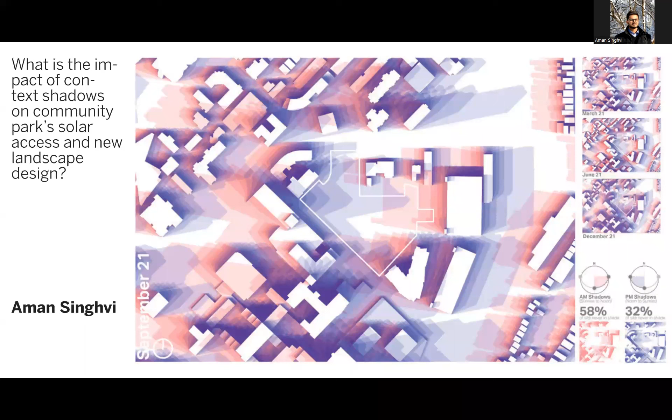I think what the judges liked about this was that it's a fairly simple concept. What is the range of shadows across a day or a season, or within a season? But the innovation is using 2 different colors to express the morning and the evening.

So I think it's simple, it's clear, and I can say we've actually used this concept since we saw this graphic at LMN, because it's really compelling visually, but also in terms of the information it's a lot better than just a simple shadow range study that we've often done before.

Since we can't hear Aman, I'm not going to ask a whole lot. Aman dropped off, unfortunately, so hopefully he'll join in a little bit again. Okay, we'll have to overdub some of his stuff.

Okay, all right, we are going to move on to Misha. Do you want to talk about your graphic? Yes. You guys hear me?

See me? Excellent. So this graphic is for the New Canaan Library, which is a project that our firm has been working on for a number of years, but is actually going to be completed and opened in February. So we can't wait to see if the daylighting predictions really come true. So the need for this analysis came out of a VE exercise. We had this large daylit space with a clerestory that was going to be very magical and light-filled at the heart of the library.

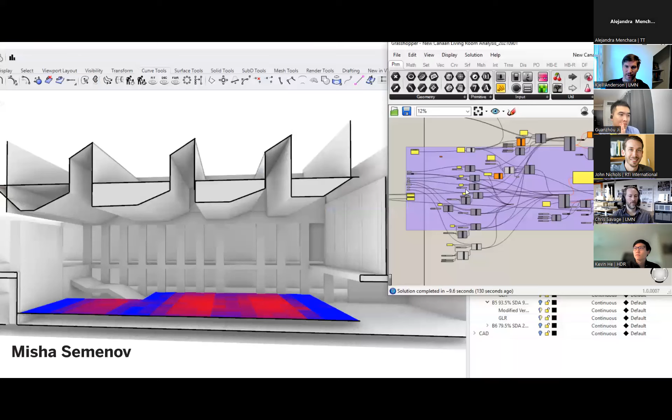So do the sawtooths face south or north or east or west? It's southwest. Southwest. Okay, so they're not trying to avoid having direct sun into them. They're actually facing that direction. Yes, that was very much the intention. And with designing the width being 3 feet, you never really get direct sun coming in, but you always get it reflected off of that wall on the east side.

Yeah, I like the fact that you did use the perspectives. I think that aligns with the 3D model a lot better. That's really a cool way of doing it. And then 300 lux, I think that's a really good choice as well. Is the living room a space for people reading? Is it kind of just a circulation lobby? What's the purpose of the living room?

Yeah, so you can kind of see on the bottom right is the entrance lobby that people would come into the library from, and they kind of circulate up through these levels. So the living room is a kind of pass through to get up to the adult and teen library on the higher floor. But at the same time, it's got couches, it's got a fireplace. It's a place for people to kind of hang out, read magazines, or maybe iPads is what people read now. But 300 lux is actually a good level for both screens and

reading. Yep. And when you say 3 foot or 5 foot skylights, is that the width of the skylight from side to side, or is that the height of it? That's the width of the skylight. Okay, cool. And it looks like they're also fairly tall. They are as well.

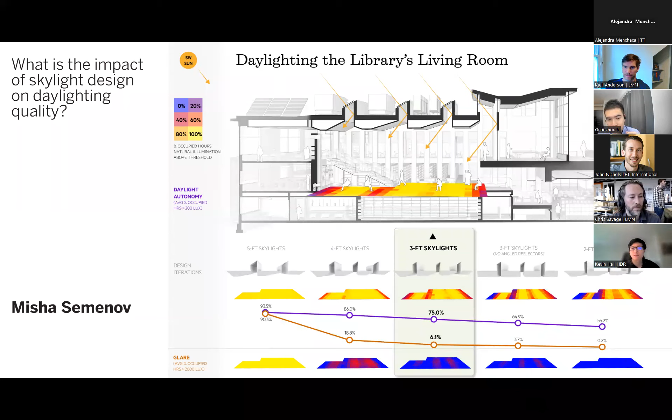That's great. Cool. Well, let's move on to Macha.

Macha, are you ready to talk about your graphic? Sounds good. Hi everyone. This is Macha Bhargav. I'm currently working as a senior analyst with Environmental Design Solutions based in New Delhi, India.

I have submitted this graphic for the project StaSIO 2021 Summer Challenge, which focused on daylight and glare. And this was a part of an academic exercise when I was pursuing my master's in building energy performance from CEPT University, India. So this was an academic exercise, I repeat.

So here, this analysis was done as an early design decision-making process, which was an imaginary scenario. And this analysis was done for one typical unit in a housing block in an Indian city, Ahmedabad, which has a hot and dry climate. So in such climate, daylight design can be challenging due to the conflict in trying to minimize the incident solar radiation on the facade.

So here through this graphic, I tried answering a simple question, which is, what is the impact of orientation on daylight performance and irradiation on the facade? This graphic attempted to show the relationship between daylight performance and the irradiation of the building. And as a conclusion, this orientation optimization was found to impact both daylight performance as well as radiation in a desirable manner.

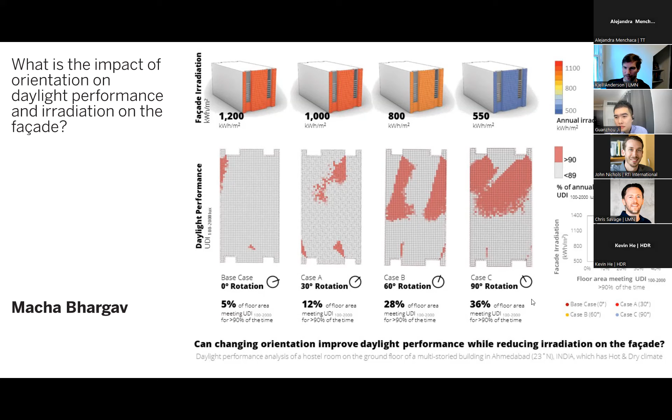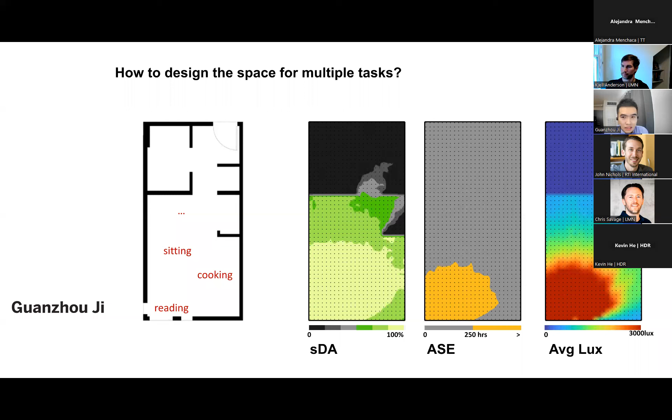Hi all. I'm Guanzhou, a PhD student at Carnegie Mellon University. My project focused on residential daylight. For living space, we can easily simulate daylight and get a result from different daylight metrics. However, humans have different indoor activities like sitting, cooking, or reading. The big question here is, how can we design the space for multiple tasks? Next, please.

Here I selected 4 living units with the same unit size, but different orientations and fenestrations. Then I outlined 3 main areas, area 1, 2, and 3. The local light level changes with the distance to window, and the 3 columns show the result of annual daylight and point-in-time results under different sky conditions.

For the upper 2 rows, for the north unit, the light level also shows a difference between the overcast sky and the clear sky condition. For the south unit, the light level actually changed a lot under different sky conditions. And I focused on the raw data, and the density of data points tells us the distribution of illuminance values. Next, please.

Another study I'm doing recently also focused on residential daylight. I do light measurement in the real world. I first capture the indoor panorama with photometric calibration for an empty room, then study functional layout. Here, furniture objects are automatically placed into the images with rendered appearance, so we can visualize the entire indoor space without modeling building geometries. That's all. Thank you.

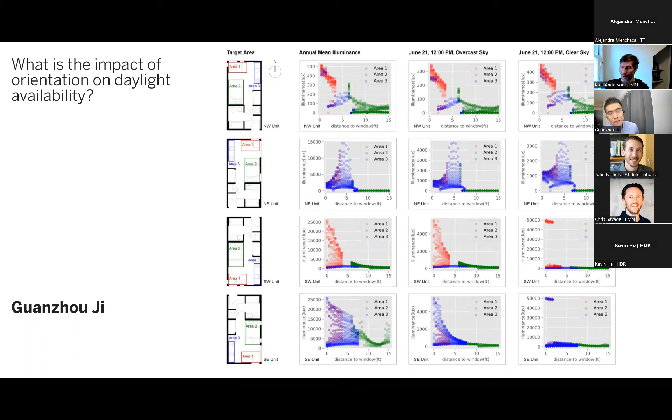Cool, well, that's great. Thank you so much for submitting this. And it's really interesting to see all the different ways of looking at daylight. We did the daylight simulation challenge, and we had lots and lots of entries that were all vastly different in the way they approach daylight. So this is a cool and innovative way of doing that.

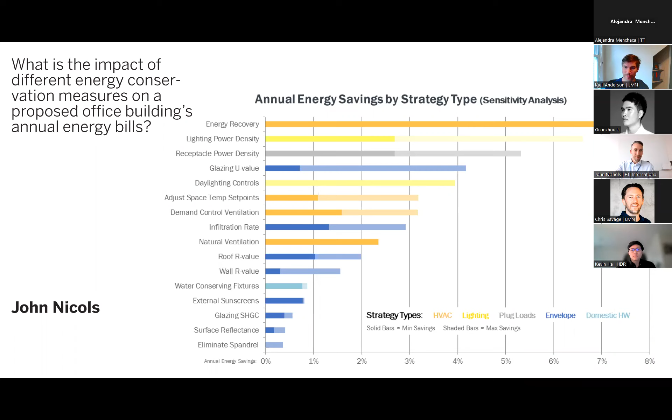The reason for this is we actually had a tool on the back end. Similar to a lot of other people who presented today, we're using Grasshopper and Excel data to drive some modeling. We wanted to produce an actionable graphic that could sum up a lot of that information for people who can't script or aren't familiar with it, so they could arrive at conclusions without needing to open up a Grasshopper file.

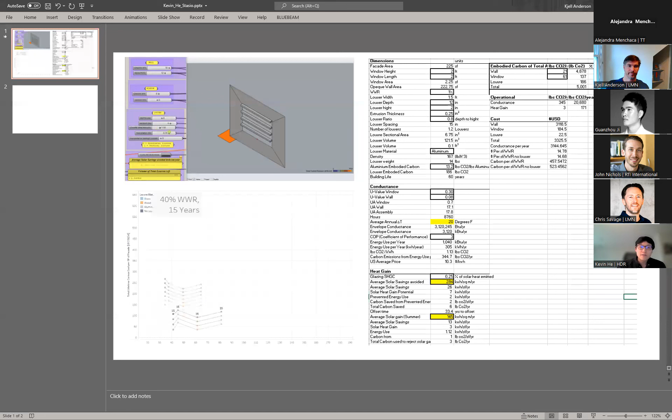So something that obviously is on the back end of the tool is there's a whole lot more at play. So the idea for the graphic is for people who are interested, there's this whole back end you can explore. So on the right, you have all these variables. So you can start to be very specific about your site conditions, the facade dimensions, the louver dimensions, different carbon costs, which is going to change over time depending on where you're getting your materials from. And on the left-hand bottom side, you can start to see also throughout time what it looks like.

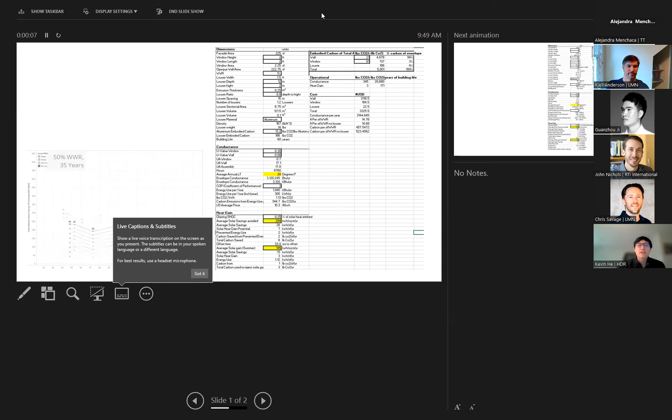So in the StaSIO graphic, we had to submit a static JPEG, but there's actually this animation that we had made looking at that offset time plotted next to all the window wall ratios and carbon costs as well. So that GIF is a more advanced version of that graphic for looking at throughout time how your design decision is going to impact carbon costs and construction costs.

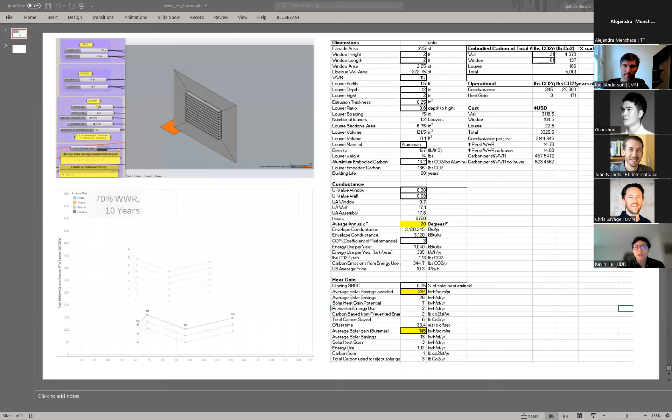Cool. Thanks, Kevin. So was this presented to a client at some point? So this was actually mostly internal, which is why I think we had a lot of flexibility in catering our specific insight that we wanted to arrive at. And the goal of it was to really produce a graphic that designers who maybe had no experience in doing any type of simulation could just pick up and use.

So for this one, it was useful for people who were working at the firm in New Orleans, and a lot of our projects were in New Orleans. So they could take some of this insight and repeat it across maybe a couple other projects just as guidelines. Mm-hmm.

Yeah, so there's a lot of complex information on here, and it reads kind of left to right. Left, you have the payback time of the louver type. And then on the left, you have the design variables, which I assume was how you selected these things in Grasshopper. Is that right? Yeah. So those were the constants that were fixed for this specific graph iteration. And as you change those inputs, you're going to get a slightly different looking graph.

And then on the right, you have these kind of flying bird shaped graphics. So if you were to present this to me right now, and you said, focus on these two pieces of it, because that's the optimum design, what would you want to highlight for the graph on the right? On the graph on the right.

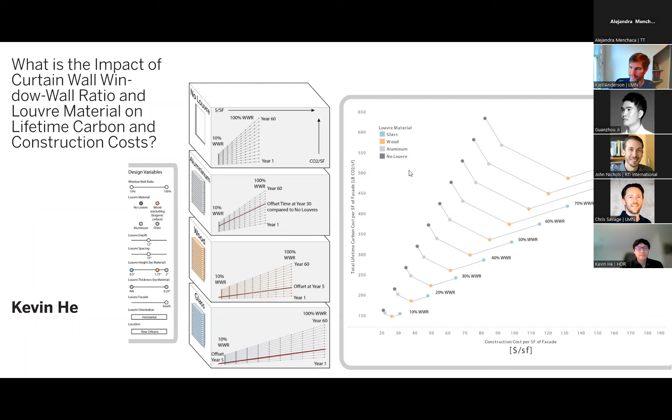Aman, do we want to go back to you? Are you around? Yeah, sure. Apologies for earlier. Hope you're able to hear me okay this time. I think we heard the presentation pretty well. It was just the very end of it was challenging. I'll do a quick 20-second recap.

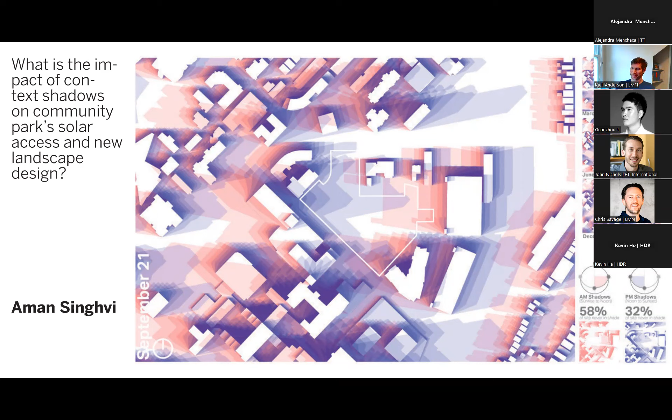And I think at the time when I submitted this to StaSIO, this was one of the first ones. This was back in 2016, and I decided to tell the story of this community through this image. Yeah.

Yeah. And was this presented to a client or was this used internally? And if so, how did the results come out, or how did the resulting design reflect this analysis?

So this was, apologies. Yeah, this was presented to the clients as well as internal, and this was also presented to some stakeholders, and I think it was received quite well, especially along with the animation. Yeah, but I think there were some different directions regarding sites, and this was just early analysis that didn't quite make it through because there were some situations that changed with the site boundaries and things like that, and there were some issues with the developers as well.

So yeah. Anyway, but it was successful in telling the story we wanted to tell, and especially the individual images at the bottom right for AM and PM shadows helped to design some of the landscape seating areas and things like that. That's great. Thanks, Aman.